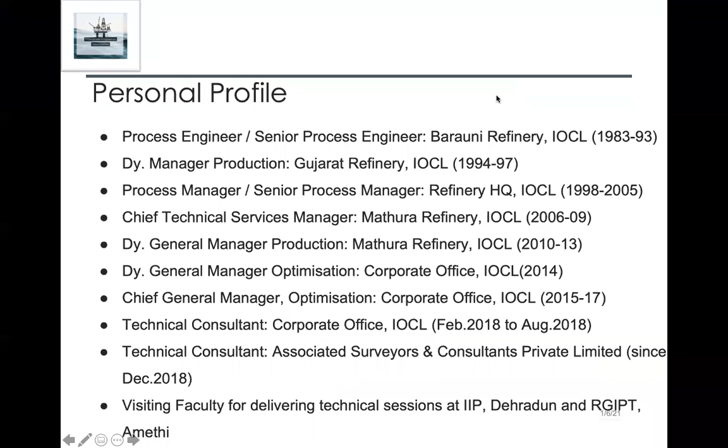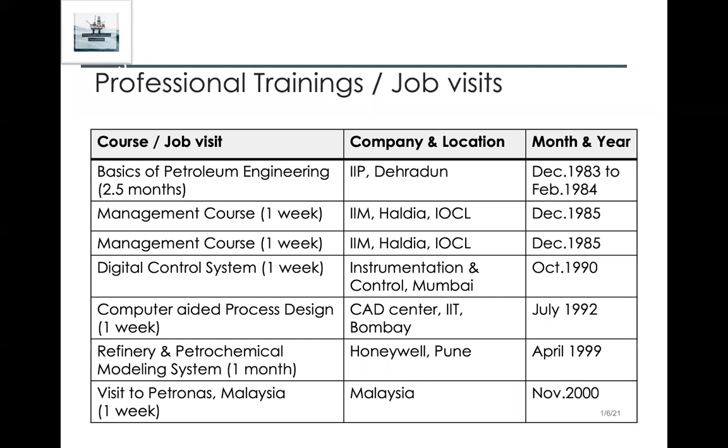Okay, this is my short personal profile. Just you can go through this. This is my professional trainings and job visits, which I have covered in my career. Okay, we'll come to the point.

This first introduction to oil and gas industry. We can divide the whole oil and gas industry into three major sectors. That is the upstream, midstream, and downstream. Upstream sector basically deals with the oil and gas exploration and production. This sector is basically cost extensive and full of uncertainty also.

In India, Oil and Natural Gas Commission, ONGC, Oil India, Cairn India, they are dealing with this upstream sector for oil exploration, as well as there are so many operators in gas site in India. Midstream basically deals with the transportation of this oil and gas from the well site to the refinery and gas processing site through pipeline and shipping medium.

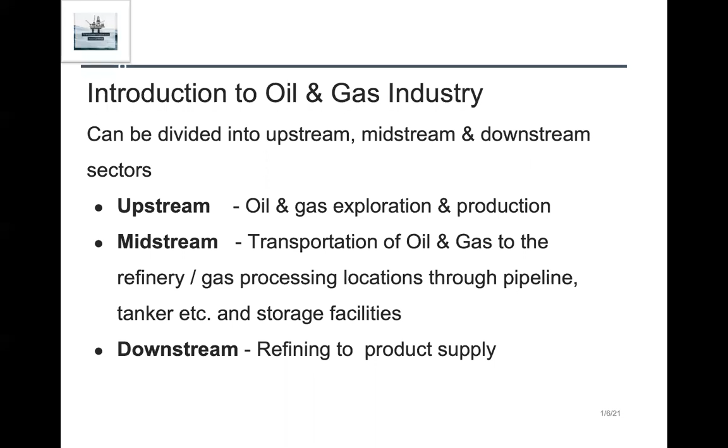To start with the downstream sector, first, it's the refining and processing of crude oil and gas. Crude oil is processed in a refinery complex. What is refinery complex? You can see that refinery complex consists of a number of processing units along with supporting infrastructure facilities. This is the first unit. We also call it mother unit, which produces straight run cuts, so straight run products.

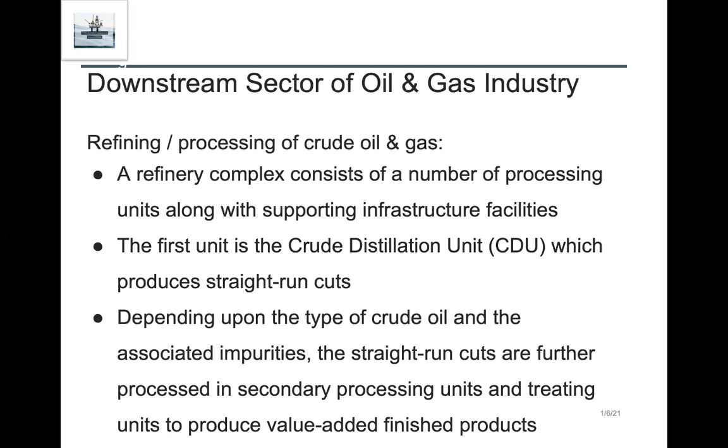Now, depending upon the type of crude oil and the associated impurities, the straight run cuts are required to be processed further in secondary processing units and treating units to get the value added finished products. Regarding supply and distribution side, from refinery to marketing location and also to customer end, there are number of modes there.

Pipeline mode, which is the cheapest and safest mode. Okay. Next is the rail, that is through tank wagon. Third is the road dispatch through tank truck, TT. And fourth is the shipping mode, that is through tanker or through vessel.

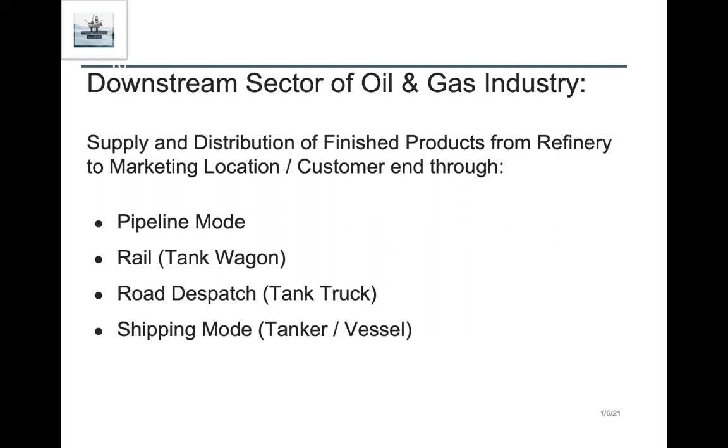Now, we will introduce about the modern and integrated refinery. What we can call it as a modern refinery. The modern refinery will consist of primary unit, various secondary units, and treating units to upgrade even bottom of the barrel to auto fuels and value-added products for improving gross refinery margin. Okay. So it will have number of units in the modern refinery for ultimately getting the finished products.

Integrated refinery is a complex consisting of the refinery, the whole processing units in the refinery, and petrochemical units. So the integrated refinery means we can say it's a combination of two complex. One is the refinery complex, another is petrochemical complex. Okay, for producing auto fuels and value-added products and variety of petrochemicals for further improving gross refinery margin.

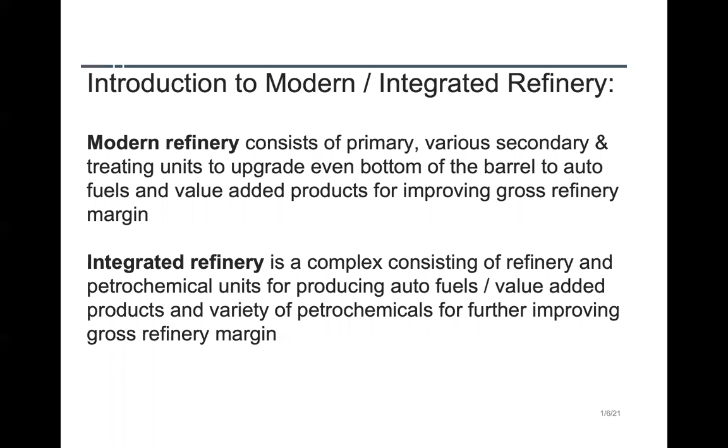Types of crude oil and finished products. We know that all over the globe, oil production is there. There are so many players, vendors, operators, companies, national oil companies as well as private companies. They are in this job. So there are number of varieties of crudes available all over the globe.

Say imported crudes. Okay, imported crudes, it may be high sulfur, it may be medium sulfur, it may be low sulfur, and some of the crudes we call opportunity crudes. Okay, say the origin of high sulfur crude is, we know that the Middle East countries like Kuwait, Dubai, Saudi Arabia, Iraq, Iran. Those are the countries having huge reserve of this high sulfur crude.

Medium sulfur, there are not many, but few crudes which are having medium sulfur, means the sulfur in the range of say 0.6 to 0.7% on crude. And low sulfur origins are, and opportunity crudes also.

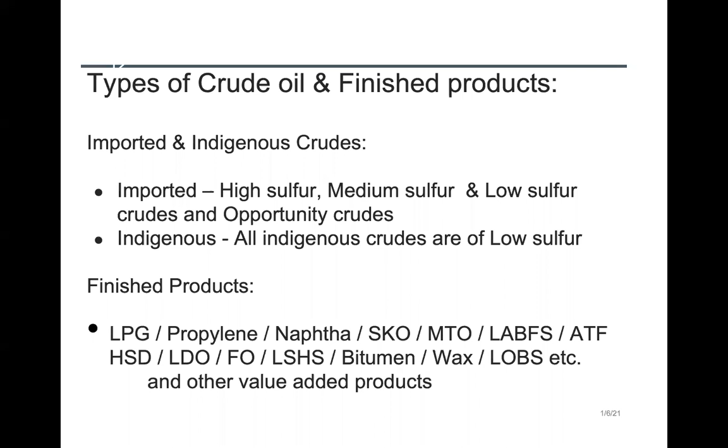Next, we'll talk about the crude assay and details of crude qualities. A crude assay gives a number of crude qualities. First of all, we have to know that the valuation of crude is dependent on what? The price of the crude is dependent on what?

There are a few specific qualities like sulfur content, API gravity, whether it is heavy or light, viscosity, TAN, total acid number, metal content, nitrogen content. So there are a few specific qualities based on which the price of crude oil is determined.

Now, over and above these qualities, there are a number of other qualities which we can go through in the crude assay only. Whether the crude is a paraffinic crude, naphthenic crude, aromatic crude, olefinic, what is the PONA content in crude, what are the other properties of crude? These are known only through the crude assay.

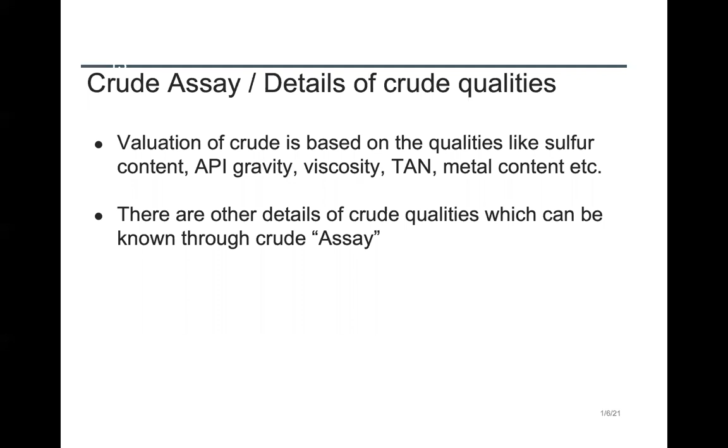Then in our full session, we will talk about the latest product specifications as per the market demand. These are the specifications in India. It is BIS standard. In Europe, it is European standard, we call it Euro. So in India, we know that from April 2020, the latest specification as per the market demand is the Euro 6 product.

So in detailed specifications for the product, we will get each and every product with its particular qualities which are required for maintaining the market specifications. We know that market specifications are as per the standards. Now, to meet the market specifications, refineries are supposed to maintain manufacturing specifications. Manufacturing specifications are nothing but specifications with some stringent values.

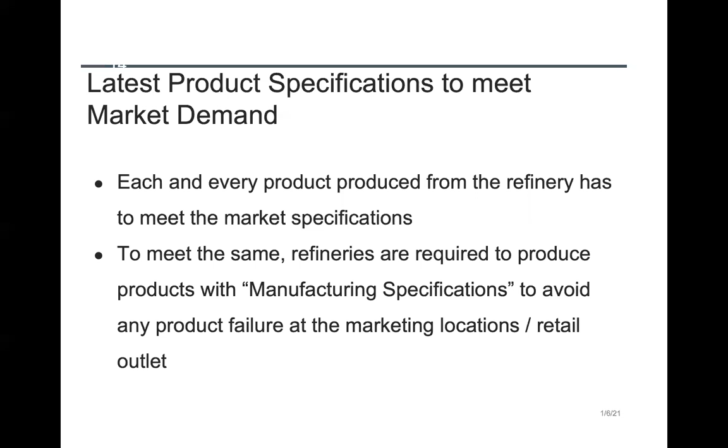Crude distillation unit. As I told, the crude distillation unit we also call the mother unit in a refinery. It's also called the primary distillation unit, where the crude is first received from the storage tankages and processed to get the straight run cuts.

We say straight run cuts because, in contrast to earlier days, maybe 15, 20, or maybe 25 to 30 years back, most of the products produced from the CDU unit were sold as the finished product.

At that time the specifications were not so stringent. So from the CDU, LPG, naphtha, then superior kerosene oil, these products were supposed to go directly to the finished product tanks.

Now, with the stringent specifications, if we go back to the specification, we see that first it was BIS: BS1, then BS2, BS3, BS4, BS6. Similarly, it is Euro 1, Euro 2, Euro 3, Euro 4, and Euro 6. So this is the history of how product specifications have gone stringent from time to time.

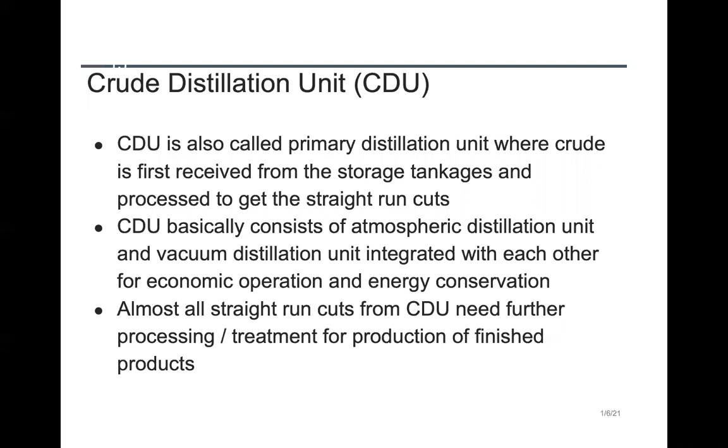As I told, almost all straight run cuts from the CDU need further processing and treatment for production of finished products. So after the crude distillation unit, the streams go to secondary processing units and other treating units. The secondary processing units are very important for refinery operation, for getting value-added products and upgrading the bottom of the barrel. There are a number of secondary units available.

Some units are based on hydrocracking: a hydrocracking unit, once-through hydrocracking unit, or residue hydrocracking unit. Some refineries are based on the FCCU, fluidized catalytic cracking unit, or resid fluidized catalytic cracking unit. In the delayed coker unit, the bottom of the barrel, which we normally call short residue or vacuum residue, is processed.

In earlier days, the hydrocracker unit or once-through hydrocracker used to operate with a single feed of vacuum gas oil, VGO. Nowadays, there are many units in operation all over the globe where vacuum residue or short residue is the feed of the hydrocracker unit. With higher operating pressure and temperature, and with the latest advent of catalyst series, we have a lot of resid hydrocracker units operating all over the world.

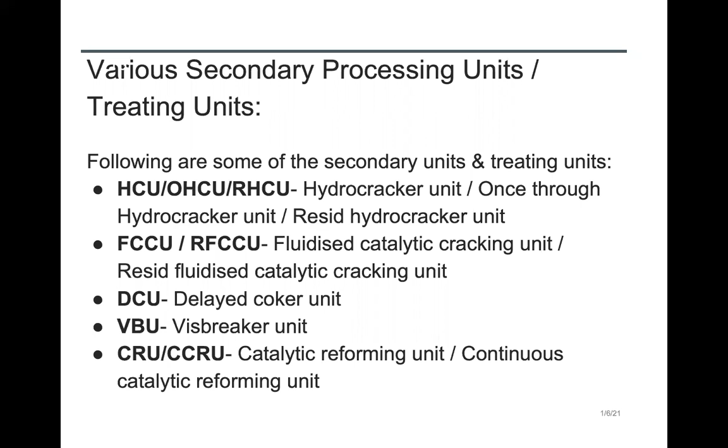CRU, CCRU, this is the catalytic reforming unit or continuous catalytic reforming unit. Earlier we used to call it CRU because this unit, after running 2.5 years, needed regeneration of the catalyst. But now all modern refineries have CCRU, where the regeneration of the catalyst is continuous. The purpose of this unit is to upgrade naphtha to reformate. Reformate from CCRU nowadays has an octane number up to 105, 106. This reformate is a major component of petrol, or MS, motor spirit.

There are a number of treating units; as I told, due to progress of product specification from BS1 to BS6, a number of treating units have come up. Let us discuss some. NHT, the naphtha hydrotreating unit, is for removing the sulfur component from the naphtha feed before processing in CRU, CCRU. DHDS and DHDT are diesel hydrodesulfurization and diesel hydrotreating units, where we receive the straight run gas oil from the crude distillation unit, and it is hydrotreated to remove sulfur, nitrogen and other impurities.

Earlier we used to operate DHDS, particularly for BS2 and BS3 production. The DHDS unit operated at a pressure in the range of 30 to 40, 45 maximum, and it removed sulfur, nitrogen and other impurities with marginal improvement in cetane number, maybe 1 or 2. But when the product specification changed from Euro 3 to Euro 4 and to Euro 6, DHDS was not sufficient to get the finished product.

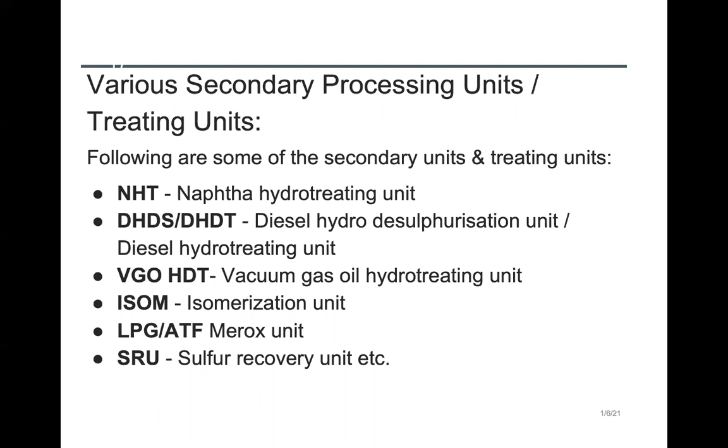Sulfur recovery unit. This is required for each and every refinery to recover the sulfur from the streams, because without recovering the sulfur from the streams, you cannot emit the gases to the atmosphere. So along with the crude processing unit and other secondary units, you have to have the sulfur recovery unit in each and every refinery for improving the quality of the gases before emitting to the atmosphere. And with that it gives sulfur as a byproduct.

Then we will talk about the petrochemical complex. What are the units? What are the products we get from the petrochemical complex? Now, in petrochemical complex, in India, we have many players. Indian Oil is one of the players, having a petrochemical complex at Panipat and Paradip, and some units of Gujarat refinery are also producing some petrochemical products. Other major players are Reliance. Reliance is the major petrochemical player in India, and there are other companies producing petrochemical products.

So the naphtha cracker unit is the mother unit in case of a petrochemical complex. Now, this petrochemical feed can be naphtha, can be gas also. In India, we have naphtha as the feed for the petrochemical unit. So the naphtha cracker unit is the mother unit of this petrochemical complex. There are other products which we get from the petrochemical complex, and based on that, there are a variety of units. MEG, the monoethylene glycol unit, polypropylene PP, high density polyethylene HDPE, low density polyethylene. Then butadiene extraction unit, benzene extraction unit, pygas hydrotreating unit. Over and above this, there are a number of other units in the petrochemical complex.

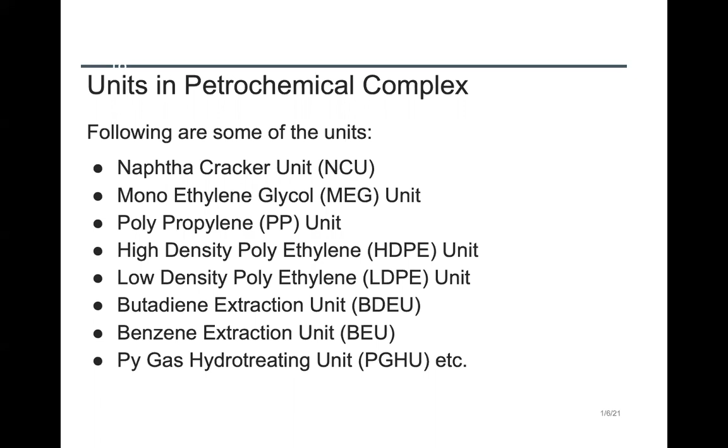Now, refinery production plan and product supply and distribution plan. This production plan, refinery production plan, nowadays is totally based on LP modeling system. Okay, there's software available like RPMS, which is Refinery and Petrochemical Modeling System, supplied by Honeywell. The PIMS, Petroleum Industry Modeling System, is supplied by Aspentech. Okay, there are other SIMSI and other software systems.

Okay, so total refinery production plan is based on this LP model, which gives the optimized result. That means it is meeting your production target, as well as it is giving you the maximum margin from the refinery. Okay, so in that way, it carries a number of simulations, number of runs for maximizing the margin of the refinery.

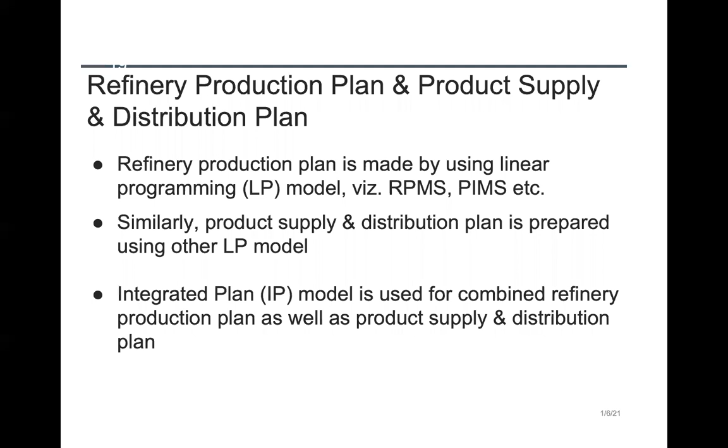Refinery gross margin. Now, after running the refinery, basically the refiners will be interested to maximize the gross refinery margin. Okay. So what is gross refinery margin? This is basically the net differential between the total finished products realization and throughput costs net of intermediate stock differential. Or we can say that gross refinery margin is nothing but the sales value of the products minus the crude costs.

Because in a refinery, we know that out of total costs, crude cost is around 90 to 93%. Okay, so we can simply say that gross refinery margin is nothing but the difference between the realization of the product sales and the crude costs. Okay, so the refiners will need to know how to improve the gross refinery margin. This is basically a big subject. How to increase this margin?